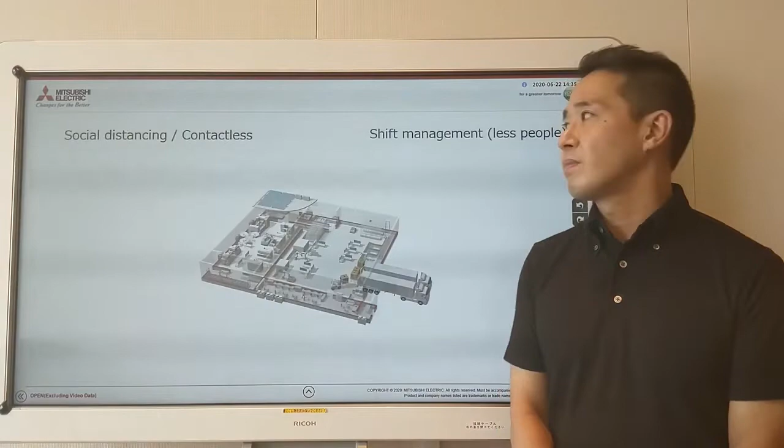Okay, what's changed inside the factory? I think there are 2 main points that have changed. The first thing is we are going to need to do social distancing and contactless. The other thing is shift management, meaning we have to manage the factory with less people.

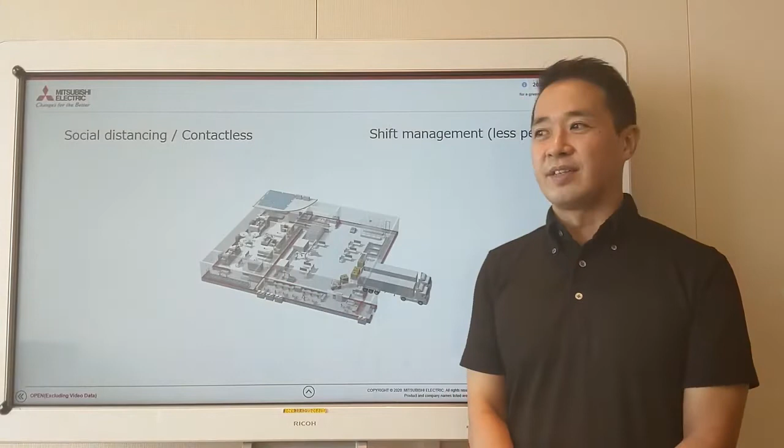First, about social distancing and contactless. I think you can imagine, every day in the restaurant you say take your social distance, but it's the same in the factory. We can't afford to have 2 people close together. They have to take their distance 2 meters away.

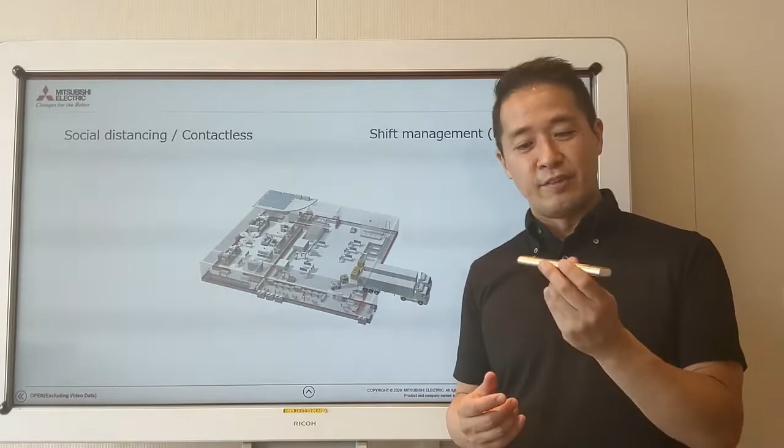And the other thing is contactless, meaning in a normal factory you would have one product flowing out the line, but in this case, this product may be the carrier that will infect everybody throughout the factory line. So you want to reduce this contact as much as possible.

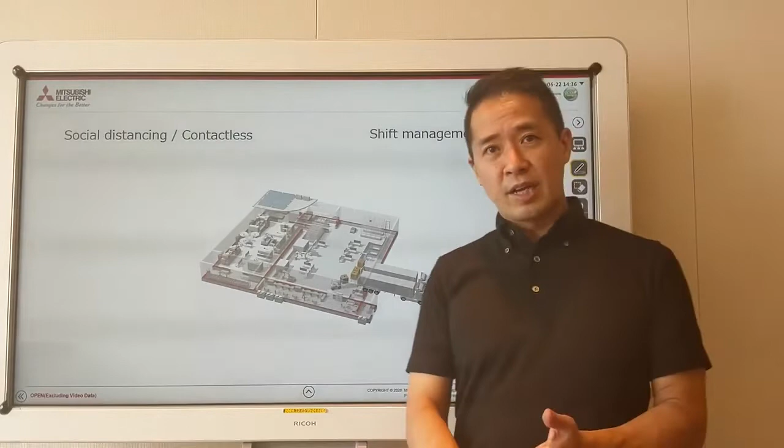In order to accomplish this, what do you need? I think there's a couple of things. Of course, doing more machining or putting more robots inside your factory line is an obvious choice. If the machines are doing the work and humans are not, then you reduce the risk of having infections.

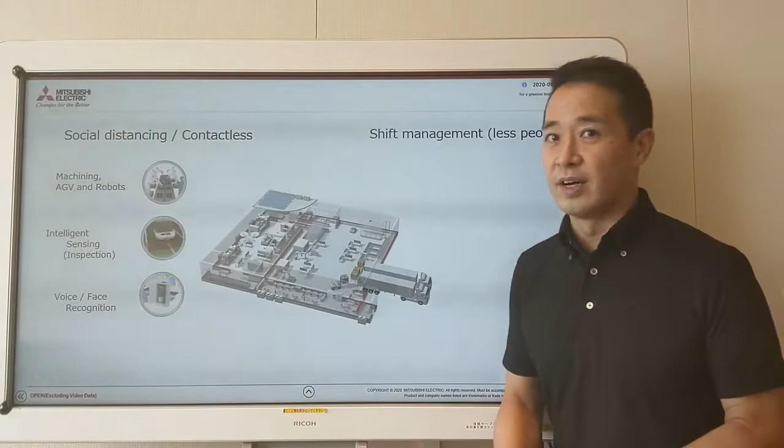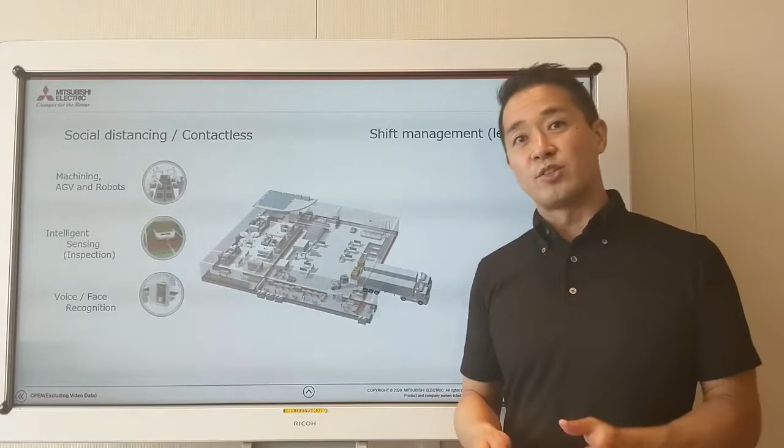The other thing is also sensing and inspection. In previous days, you would do it by eye, using a hand, touching the product. But we have all this cool technology with image recognition and vision inspection. So why not use this technology more in the factory to avoid contact?

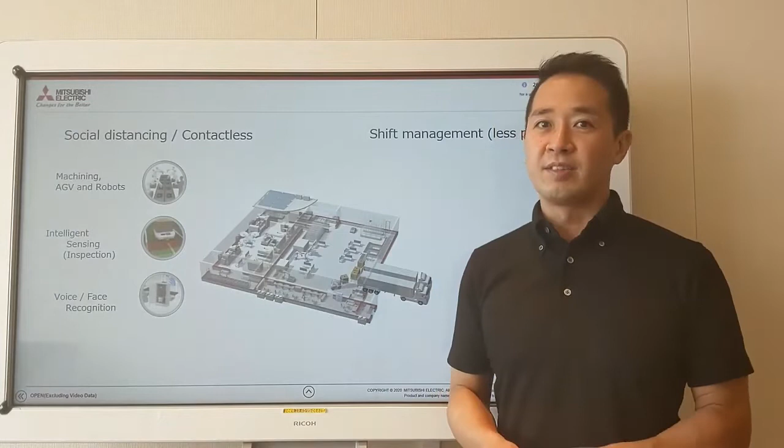And the other thing is voice and face recognition. There's a lot of buttons in the factory. You're pushing a screen, you're pushing a button, but this is also some risk to become contagious. So in that case, if you can use your voice to control things, why not?

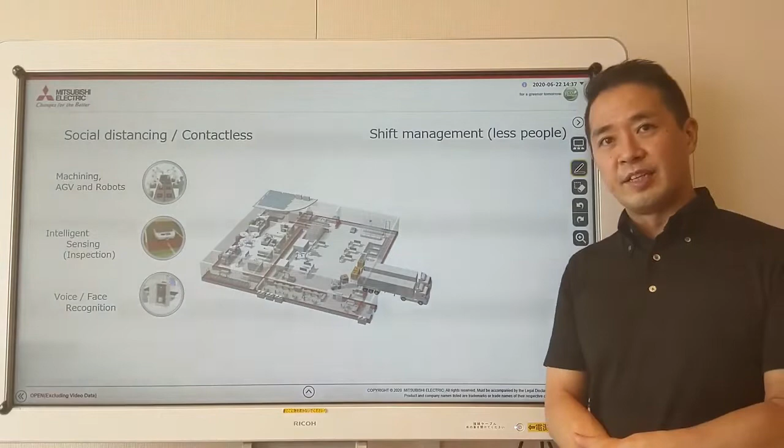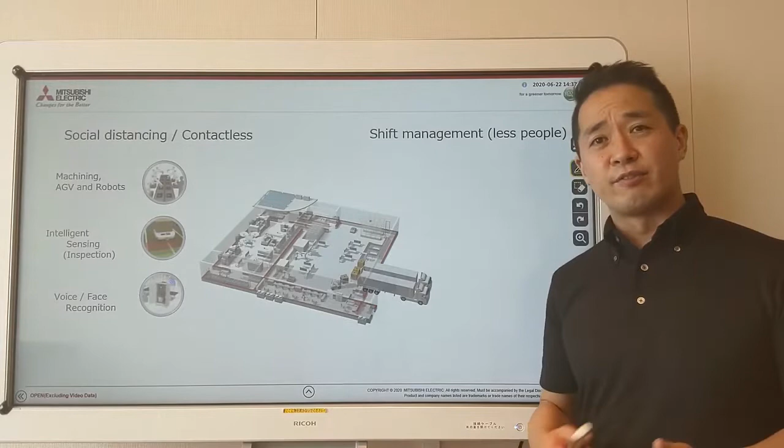The other aspect is shift management, meaning less people. We're doing this also in our factory. It's very risky to have one shift with all the crucial people for the production line working at the same time, because if you're unlucky and somebody gets infected, you have the risk of shutting the whole factory down, and there's nobody who knows how to operate the line.

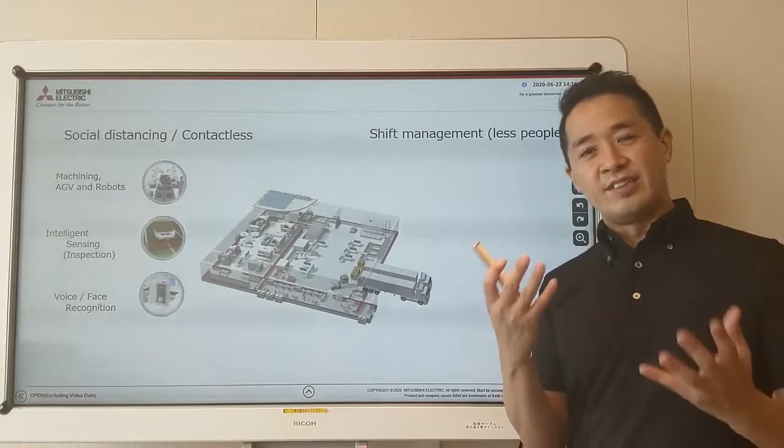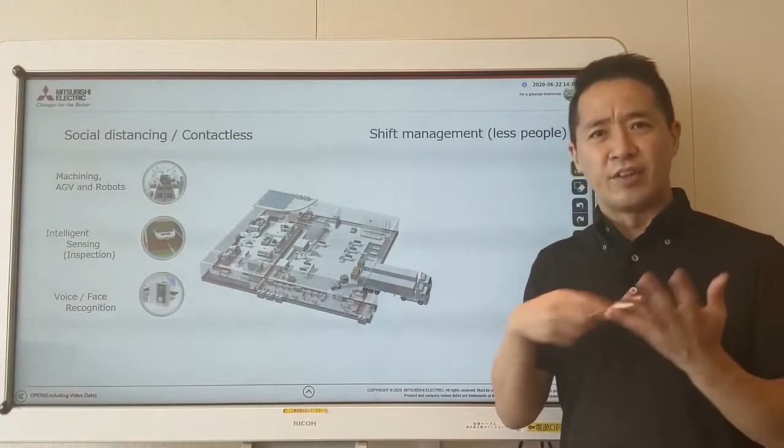So what we're doing in our factories is dividing up the people into shifts and making sure on these 2 shifts that there are people who know how to keep this production line running. If we can do that, even if unluckily one shift was infected, we still have the other shift able to continue production, so we'll still be operational.

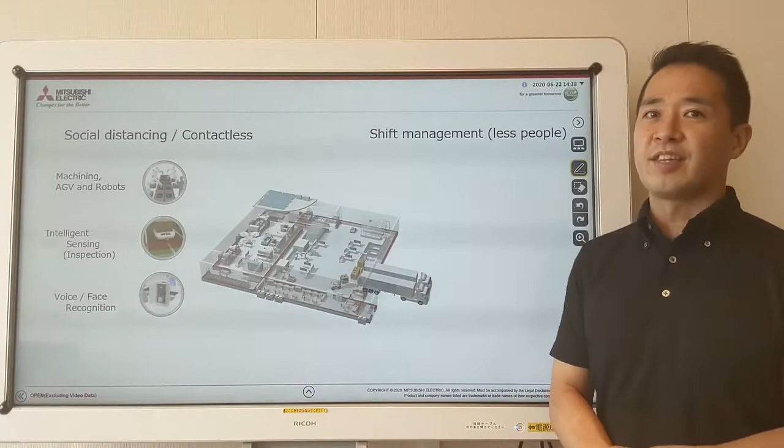So think about this. If you think about shift management, it means 2 things. One, that you're going to have to manage with less people, which means you're going to need more automation. And the other thing is you're going to have to grow the knowledge level of the fewer people, because there's less people to run the line, meaning they're going to have to do more multitasking.

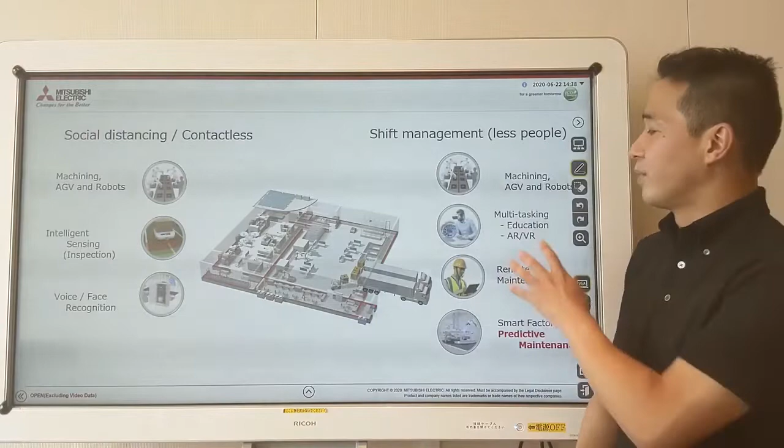And in order to do multitasking, you have to teach them first. So you have to educate them to learn some of the tasks or some of the operations that they didn't know before.

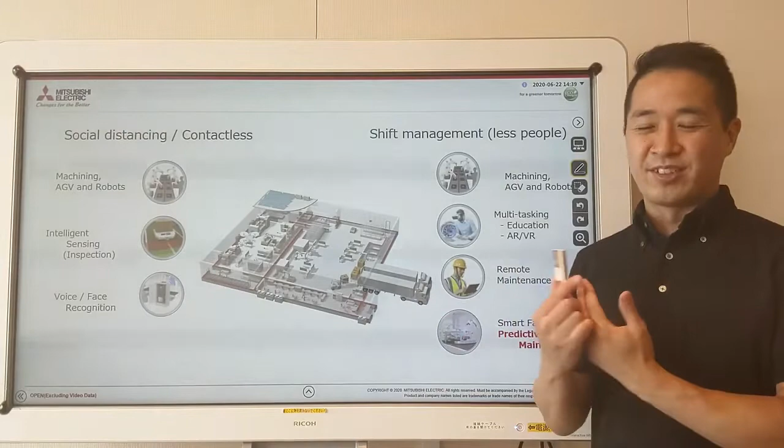But it's really hard to do education now, because education is standing next by the worker and teaching how to do things, but that's not obeying your social distancing. So I think we're going to be seeing more AR and VR tools to make education easier.

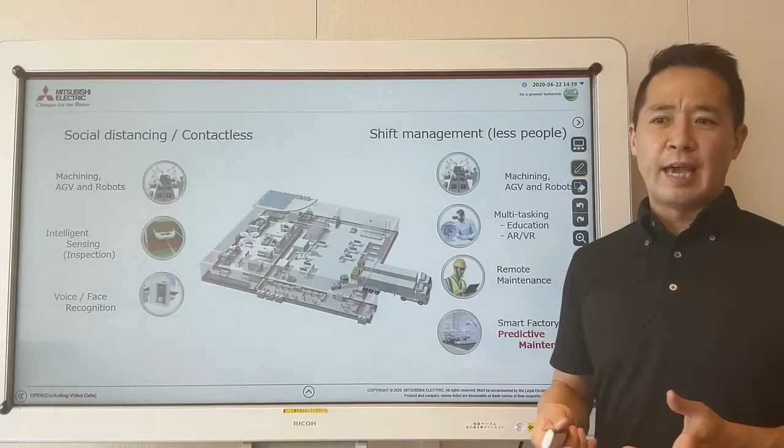One more thing is remote maintenance. Of course, you can't transfer all the skills, so there will be times when you're off shift and a big problem happens in the production line, where you don't have the right staff because you're separated into two. In that case, it's vital for him to remotely access the factory, see what's going on, and send advice to the staff working on the factory floor to fix things.

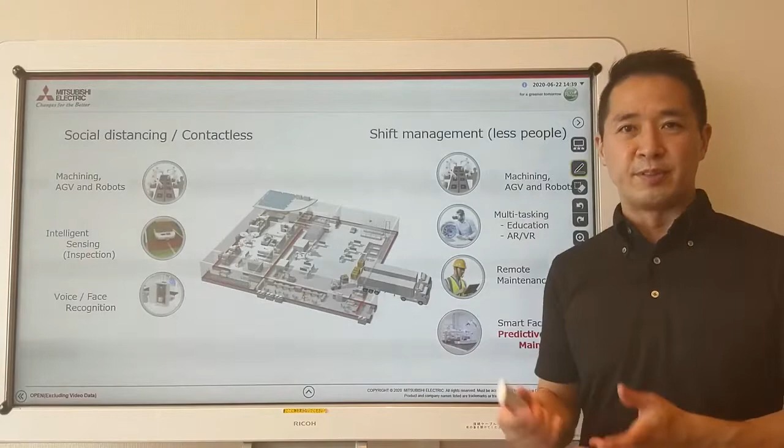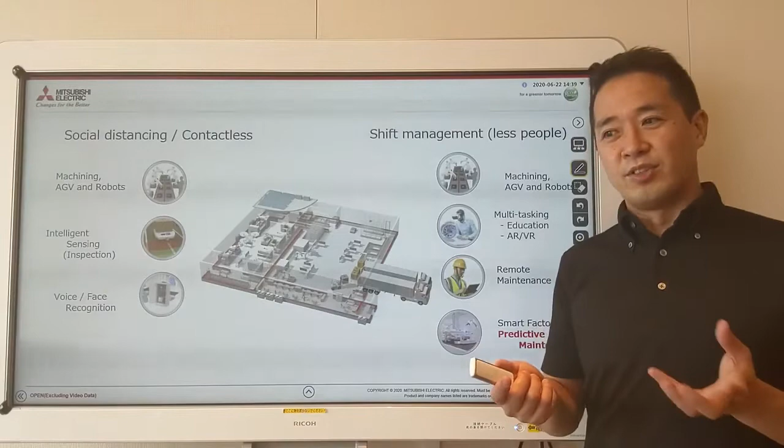And this is the same with overseas trips. In the past, big problem, you would sometimes even have to send an engineer over to the factory overseas, but now you can't do that, because he's going to be confined for maybe 2 weeks before he can get into the factory. So that's why remote maintenance is so crucial.

The next step, and the ideal step, is making a smart factory where you don't need people to do the maintenance work. The AI and the cloud figure everything out and do predictive maintenance for you, so it's easier to work with fewer people. Today I'm going to talk a lot about predictive maintenance, which I think is very important for finding problems that might occur in your factory.

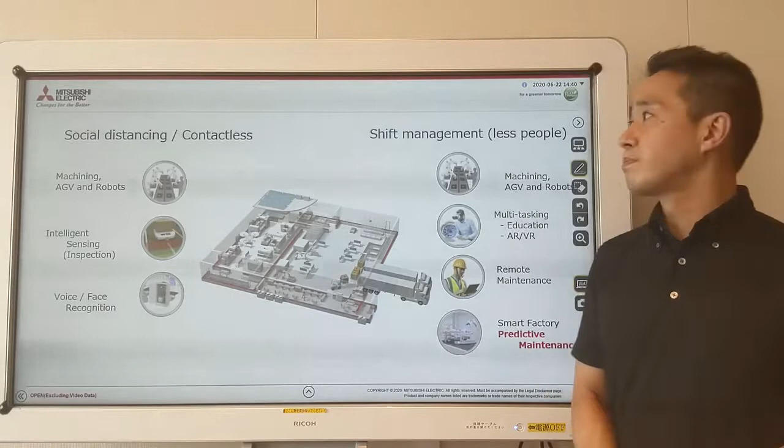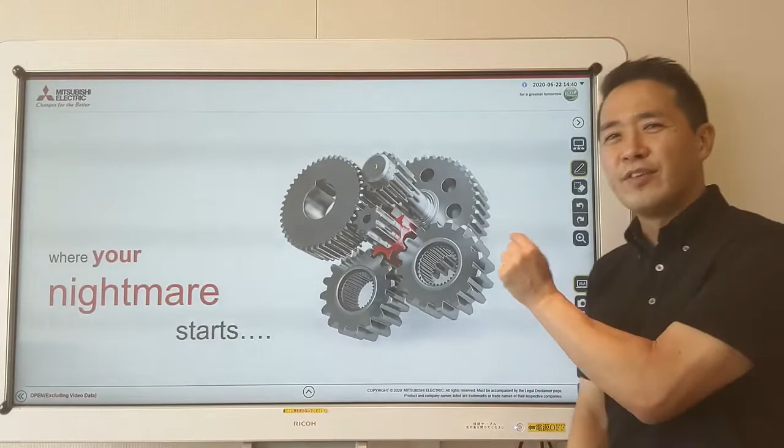I'm going to tell you a kind of story, but I'm going to go backwards in time. Right now, there's a guy who's holding his head. It's because the factory line stopped. A machine broke down. He's trying to find some spare parts to fix the machine, but the supplier says, 'Hard luck, this is a special part, you're going to have to wait 2 months.' So the production line is going to stop for 2 months, so it's actually a disaster, and that's why he's holding his head.

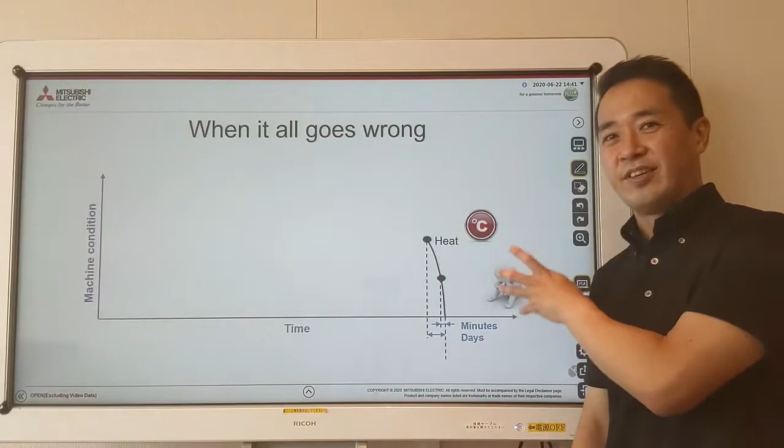But if you look at what happened before this, minutes before, some smoke came up and something was wrong, and they found out there was a problem. But if you look days before, actually this machine was gaining heat, getting a little bit hotter. If you touched the machine, it was a little hot. But nobody found out or decided to do anything about this.

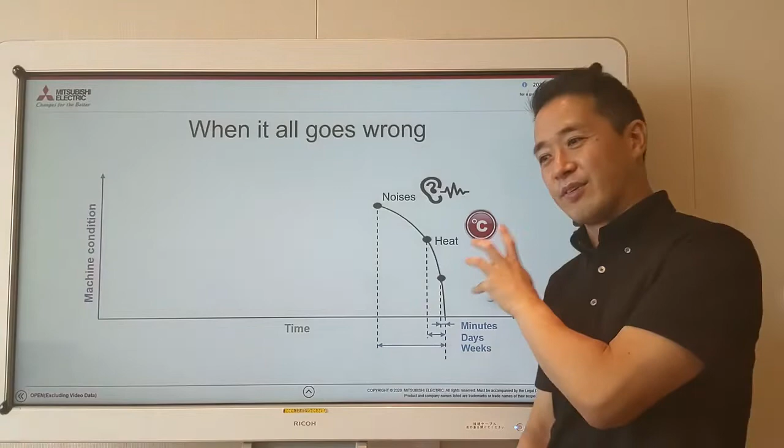Before that, weeks ago, this machine was actually putting out a very low sound that people's ears couldn't hear. It's because a screw was getting loose, and the panel was getting loose and wobbling, so that's why they had this strange noise. And if you go before that, there was actually a lot of vibration months ago, but nobody was paying attention. It was very small, so nobody noticed it.

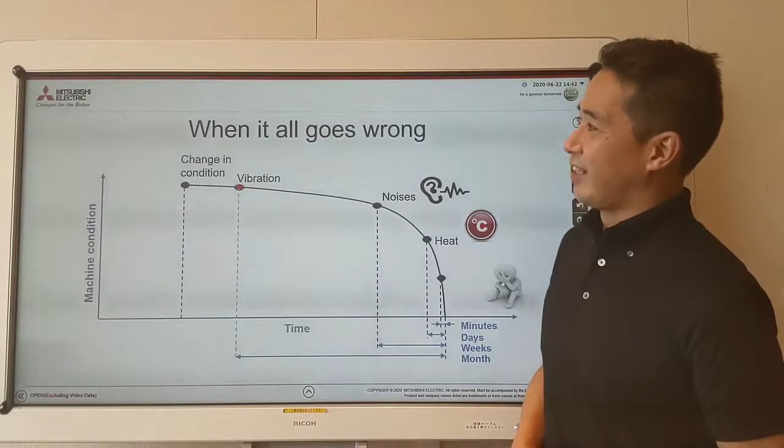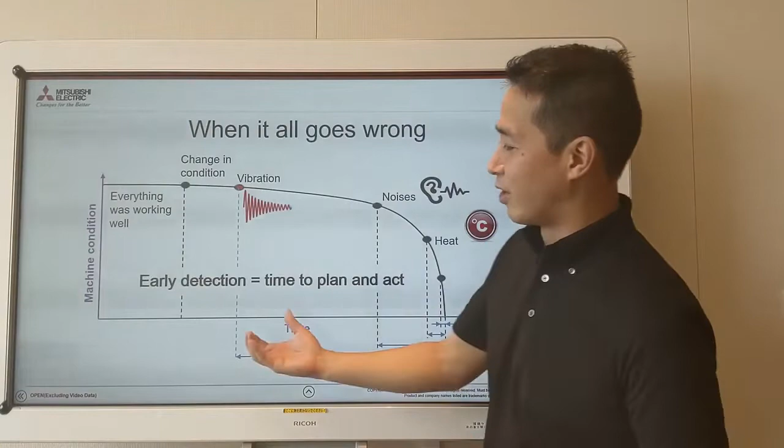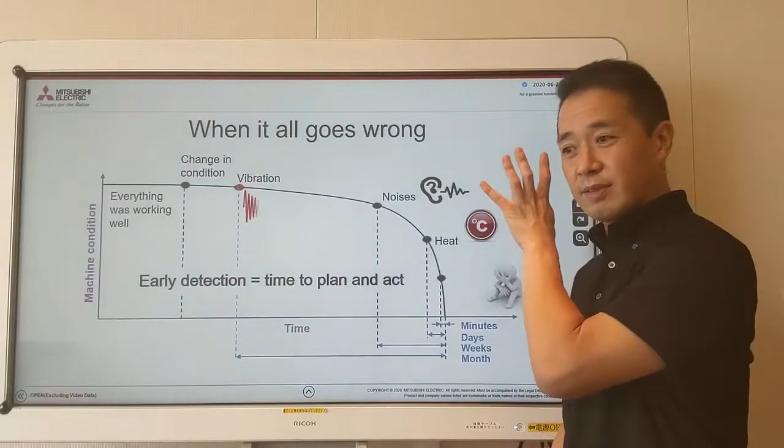But the screw was getting loose over here. What I'm trying to say is there was a change in the condition months ago, and if this guy had been able to detect that before it happened, he'd be able to do something. He'd be able to say, 'Okay, this is a bad trend, so just to be safe, I should probably order some spare parts for this before that, and that way, if something happens, I can exchange the part.' And if he had done that, he'd have had the spare part in time, and he would have been able to avoid this massive shutdown that he actually had. So finding out this kind of change in condition and vibration beforehand is very important.

And that's what we're talking about when we talk about predictive maintenance.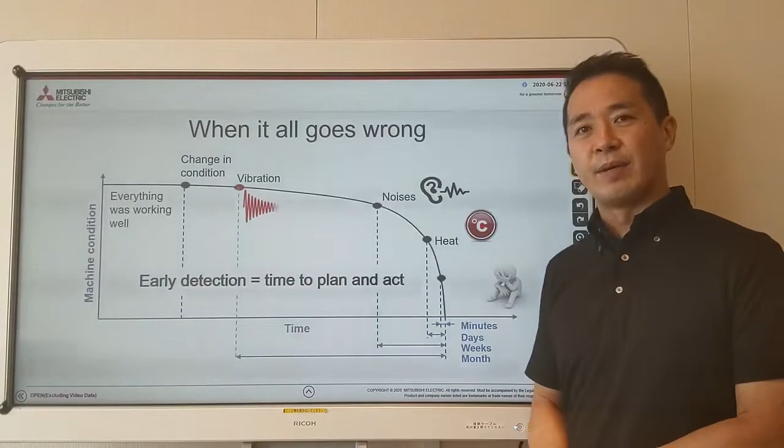For maintenance, you need data. So you're looking at the manufacturing data, what you're producing, the time. Also very important is the machine process data: the temperature of the machine, the pressure, the voltage of the motors, the current, those kinds of data.

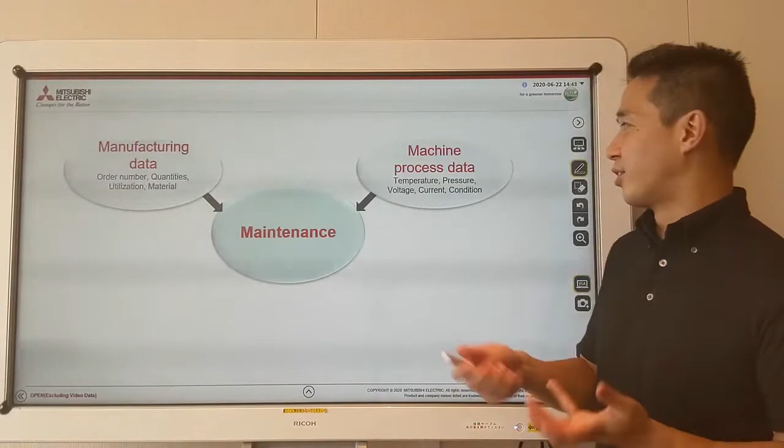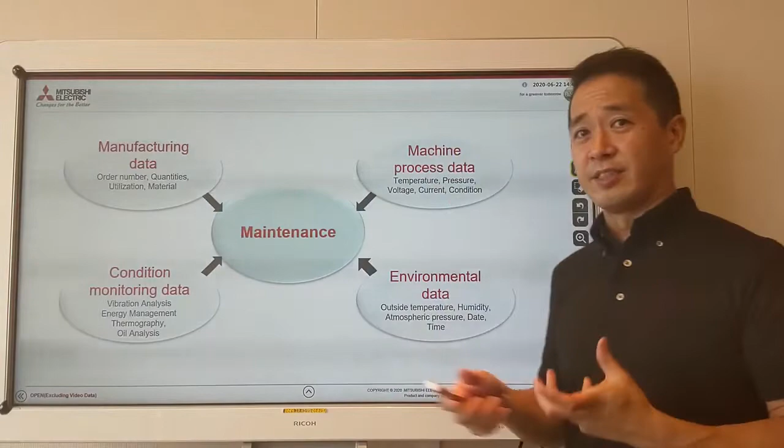Also, environmental data is very, very important, especially in predictive maintenance. We're talking about temperature data, humidity data, atmospheric pressures, and you also need some kind of maintenance condition monitoring data, like models and mechanisms to absorb this data and figure out when it's going to break. So maintenance is about collecting data and utilizing data.

Well, your final goal is to install a 24-hour doctor. What I mean by a 24-hour doctor is, usually when you see a doctor, he says your blood pressure is going up or you have too much blood sugar. Every 3 months you go, like a normal checkup. But sometimes every 3 months is too late in a factory. You need to find out if something's going wrong the minute it's going wrong.

In order to do that, the best way is to have a doctor always looking and checking what your health is doing. And that's what we're talking about when we talk about predictive maintenance systems: installing a 24-hour doctor that is constantly monitoring the system and health of your factory.

But you can't automatically make a predictive maintenance system. It always starts with collecting data, because if you don't have any data, you can't do any maintenance, you can't analyze it, you can't visualize it. So you always need to start with sensing, putting sensors on, collecting the data. Later you can visualize this data and put it into charts. Then you can decide when something is going wrong, and if something's going wrong, make sure somebody knows about it by sending out an alert.

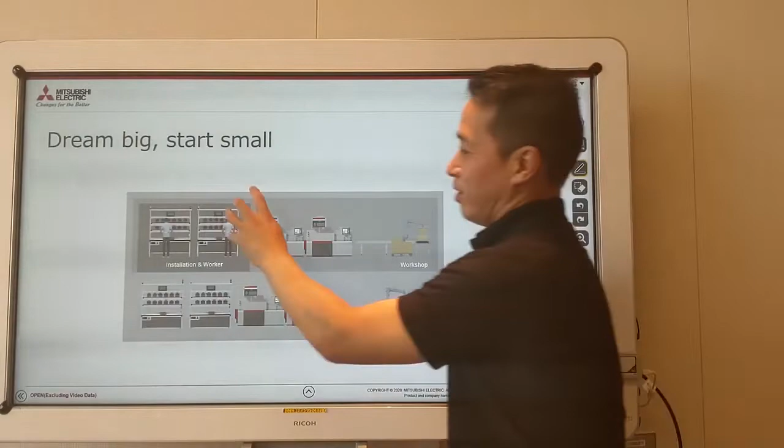So first things first. You're dreaming big, but actually you're starting small. After you do the factory line, you can move to another factory line, and finally you'll be able to do predictive maintenance for your factory as a whole. But everything starts with the individual machines.

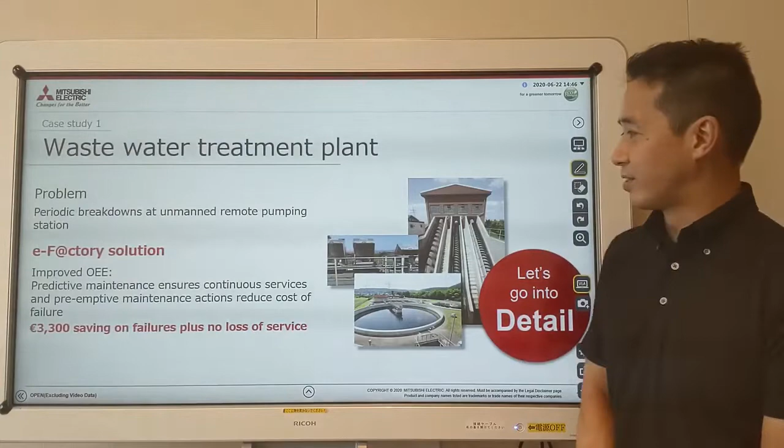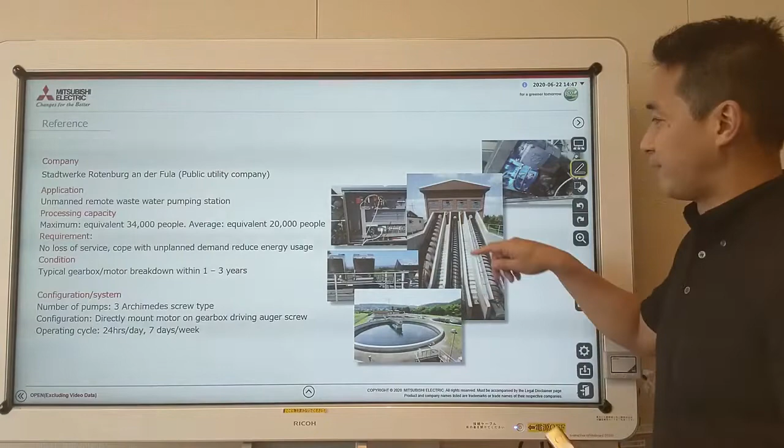It looks a little complex, but there are simple ways to do predictive maintenance, and I want to show you some examples of how simple it can be. I'm going to start with the example of a wastewater treatment plant in a small town in Germany. So let's go into the details. This is the application. It's moving wastewater from the bottom side to the upper side, using these three Archimedes screw pumps, which are rotated by a gearbox and a motor.

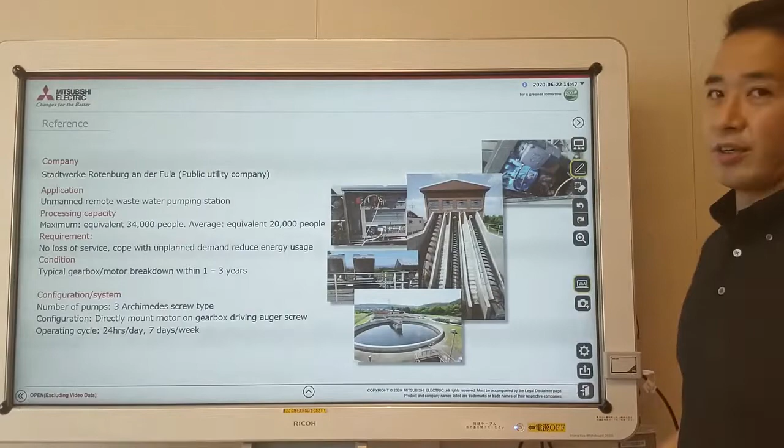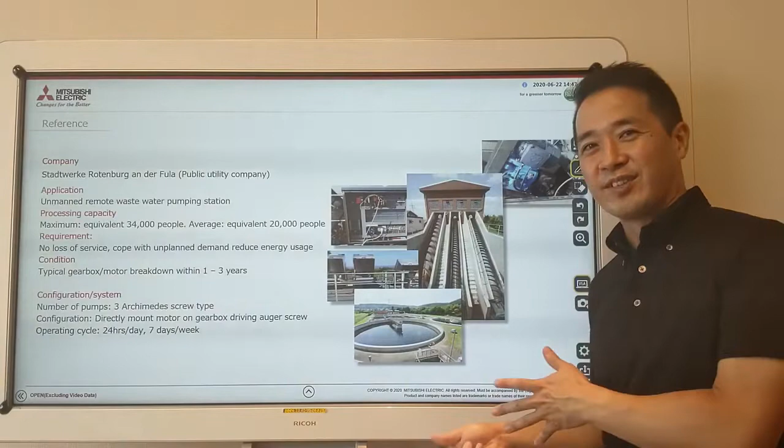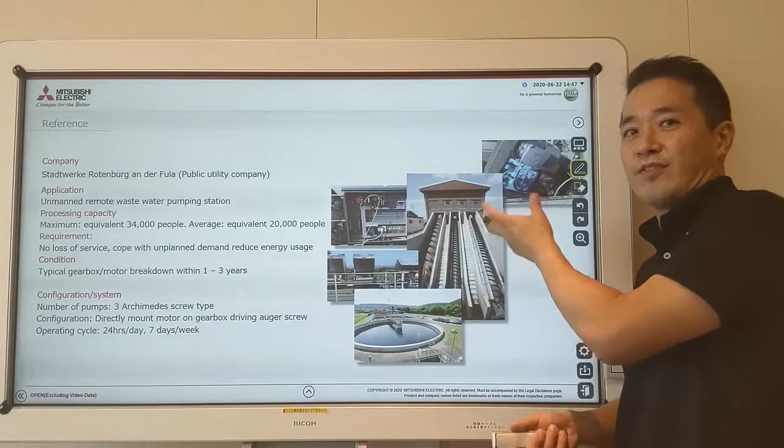The issue with this application is that it's an unmanned plant, meaning no one works in this facility, and the screws break between 1 and 3 years. So you can never predict when it's going to break. When it breaks depends on how much garbage people throw into the wastewater. If a lot of people throw a lot of garbage in, the load on the screws becomes bigger and it breaks faster, for instance in 1 year. If the water is clean, the load is less, so it might last 3 years, but you never know. It depends on everyday life.

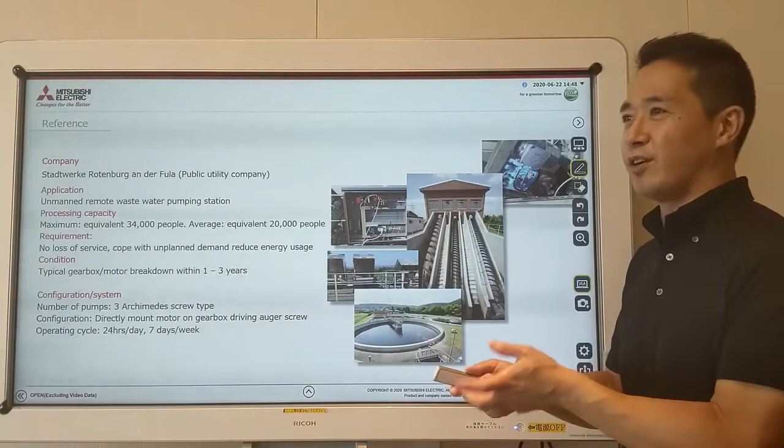They were doing periodic maintenance, meaning every 6 months they go, check to see if everything is okay, and go back. But sometimes they got an alarm that it was suddenly breaking and everything was overflowing. They wanted to fix that, predict when it would break, and fix things before the actual trouble happened.

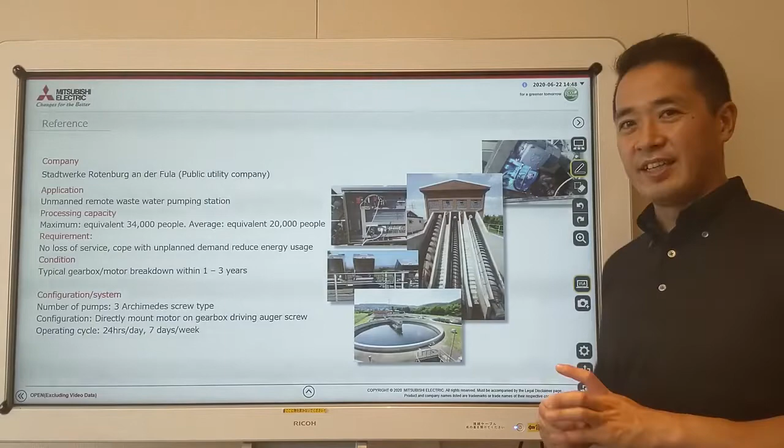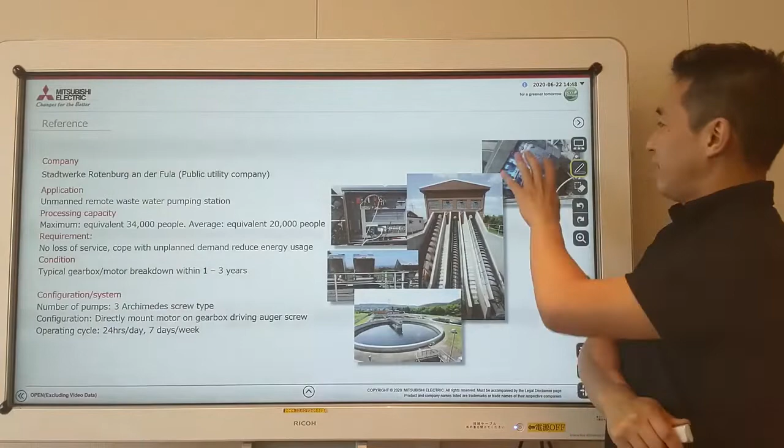So what they did is they installed a predictive maintenance system, a 24-hour doctor. It's very simple. When you think about predictive maintenance, a lot of people think you have to put sensors all over the place. But if you look at this specific application, usually the gearbox breaks, like 95% of the time, because the screws are connected to the gearbox, and this has the most load.

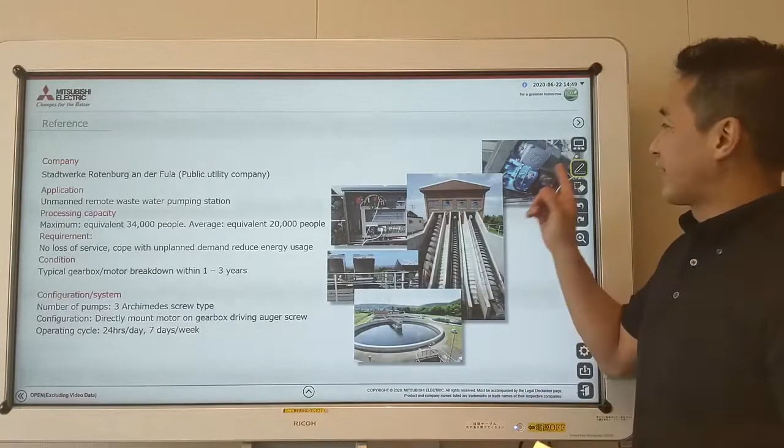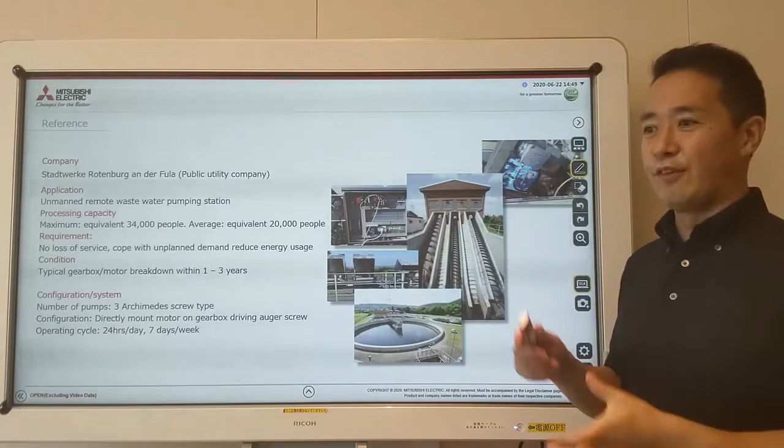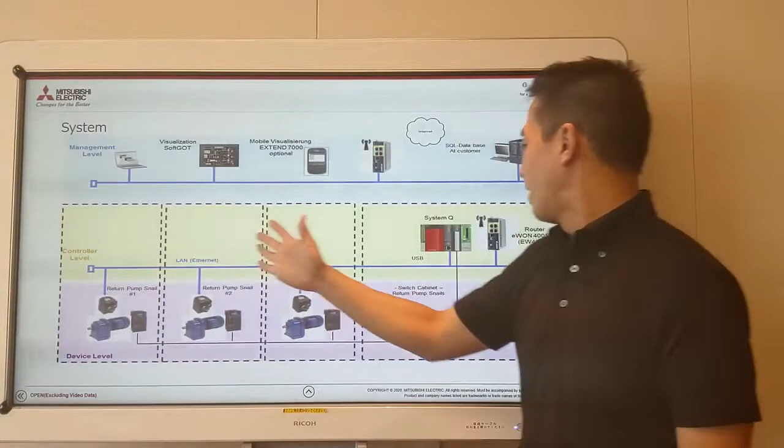If you look at the gearbox, it's connected to a motor that's rotating the gearbox. What we did in this case was we put a smart vibration sensor on the motor, because if it felt more vibration, then we know something's going wrong in the gearbox, and then we could send out alarms. So it's a very simple system. We just have 3 smart vibration sensors placed on the motors on the Archimedes screw pumps, connected to a PLC, and then remotely we connect this to the central maintenance center.

So the benefit of this is, first of all, if you wait till the gearbox breaks, a new gearbox costs about 5,500 euro. On the other hand, if you can fix the gearbox before it breaks, then an overhaul costs only 1,000 euro. So you save 4,500 euro just by doing this. The other obvious benefit is you don't have any complaints from the city if something goes wrong, and it's not an emergency to handle these kinds of situations.

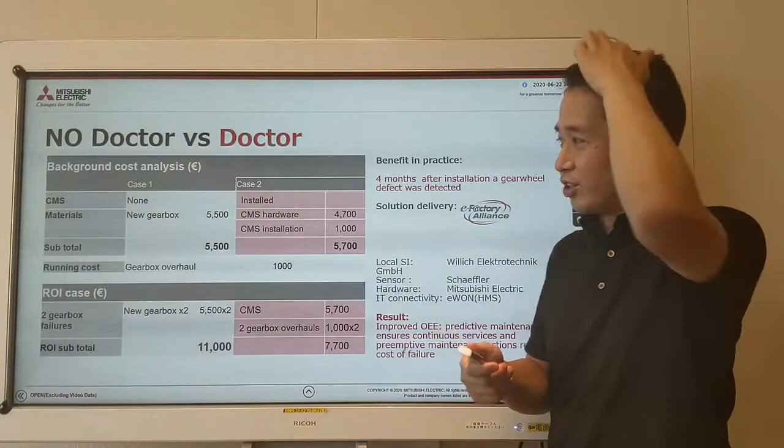So the cost of this was roughly about 5,700 euro, meaning that 2 gearbox failures is about 11,000 euro. So after 2 breakdowns, you've already paid for the condition monitoring system. So the ROI is very simple and achievable. And it's a very simple application, as you see. We were able to develop this with the partners, with Schaeffler, with a system integrator, and we did the remote connectivity with Ewon and HMS.

And luckily, it worked. 4 months after the installation, we got an alarm that the vibration pattern was not so good. It was different, and we went and found the gear wheel defect. So it's a very simple solution, but very effective, and you also get the ROI.

Next, I want to talk about maintenance on the edge. Lots of people have an image of doing this kind of predictive maintenance in the cloud, but in reality, you have no time to talk to the cloud when you're doing predictive maintenance. Think about a smartwatch where you're monitoring your heartbeat. If something goes wrong with your heartbeat, then you immediately have to call an ambulance, and you have no time to do the analysis. It's a split-second decision.

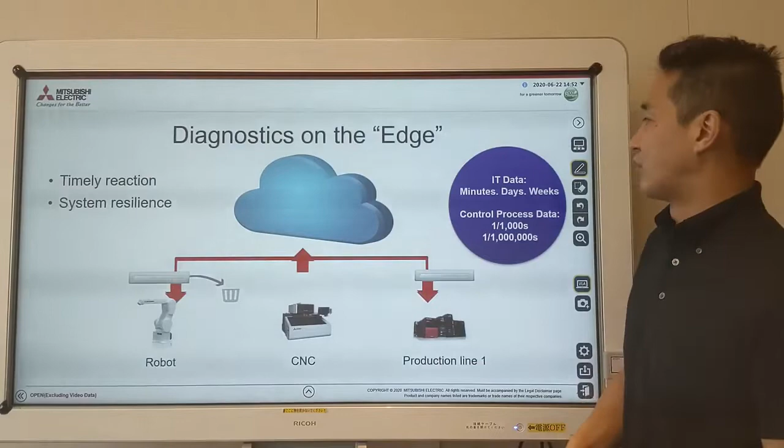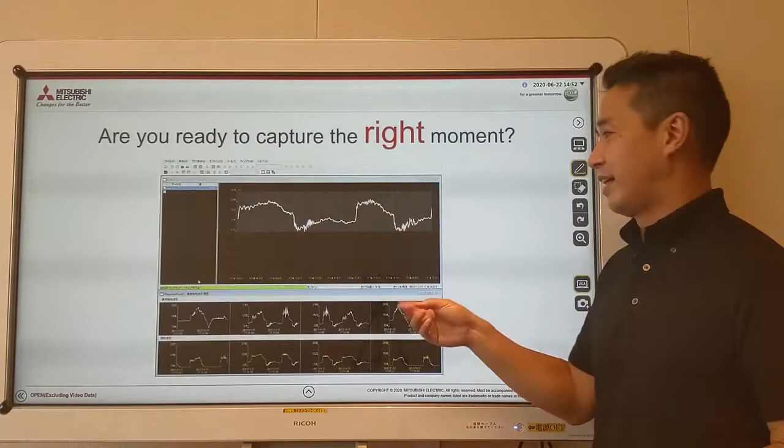Are you ready to capture the right moment? If you look at these waves of quality data, they're moving in milliseconds. You have to find this little distortion in these waves on the millisecond level, and you're never going to be able to do that if you're communicating with the cloud. All of this has to be on the factory floor with an edge computer.

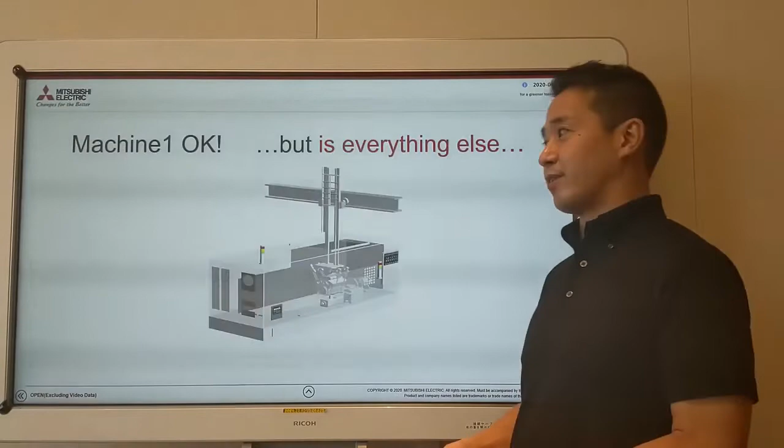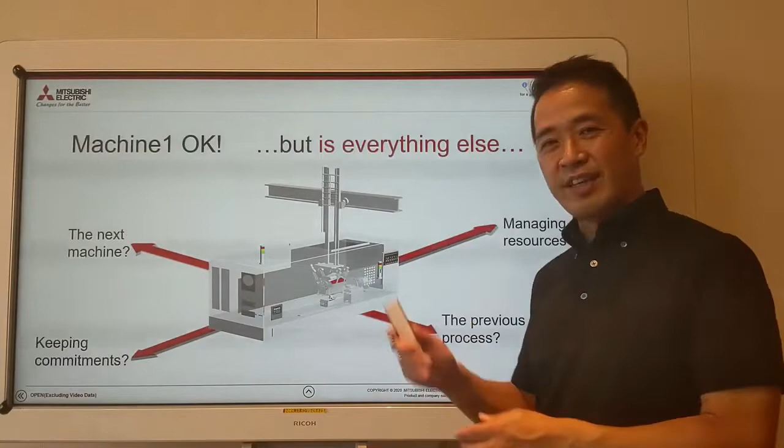Okay, so we put predictive maintenance on one machine. We're monitoring vibration on the motor. But the issue is that we're so interconnected right now in our factories. Even if you can predict a break on this machine, you have to think about what happens before in the process and what happens afterwards.

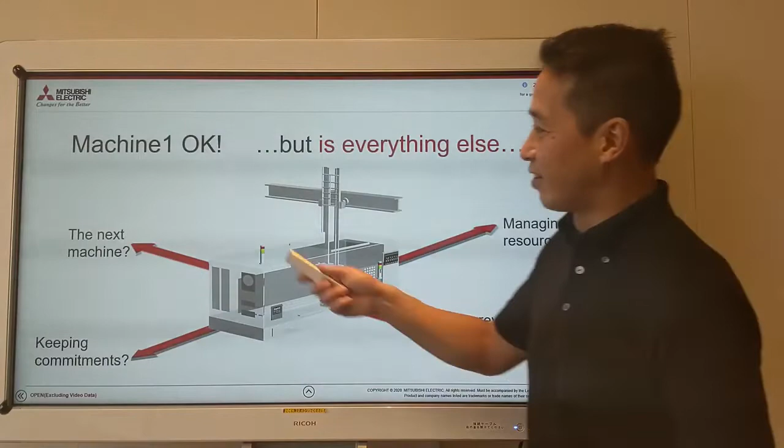Because if this machine is going to break and you're going to have to do maintenance on it, that means you're going to have to stop all the manufacturing processes before this, and the manufacturing processes after this are going to be stopped as well. You have to think, okay, this person that's managing the machine has nothing to do, so maybe I should put him on another task.

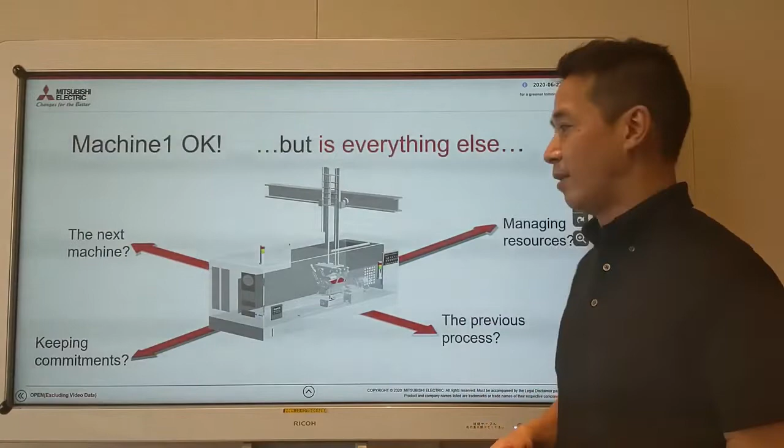And you have to think about the parts that are incoming from your suppliers. Okay, maybe because we have to fix this machine for 2 days, then you have to say, okay, supplier, wait 2 days, we don't need any product then. And this was, in the past, done by your experienced factory staff. They're smart, they have experience, so they know who to call, what to do.

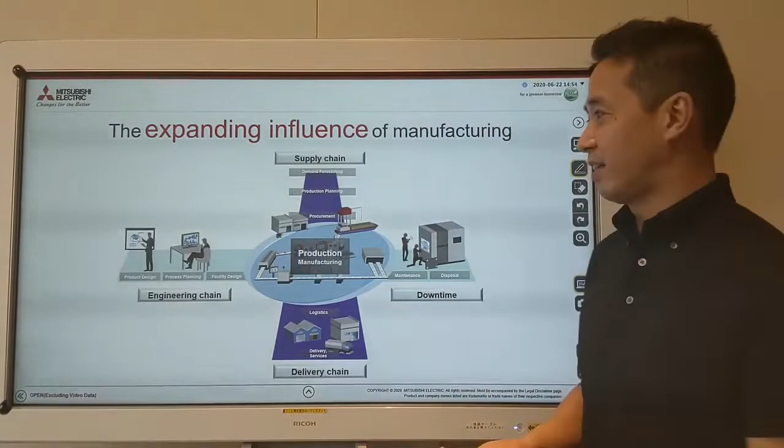But it's going to become more and more complex in the factory because, as you know, right now the delivery chain and supply chain are so interconnected, and also our engineering chains are connected as well. So managing how what happens here has an impact over here is very, very difficult to manage with the human mind. And that's why I think AI will have a bigger role in the future, because AI has the capability of figuring out what impacts what when something goes wrong.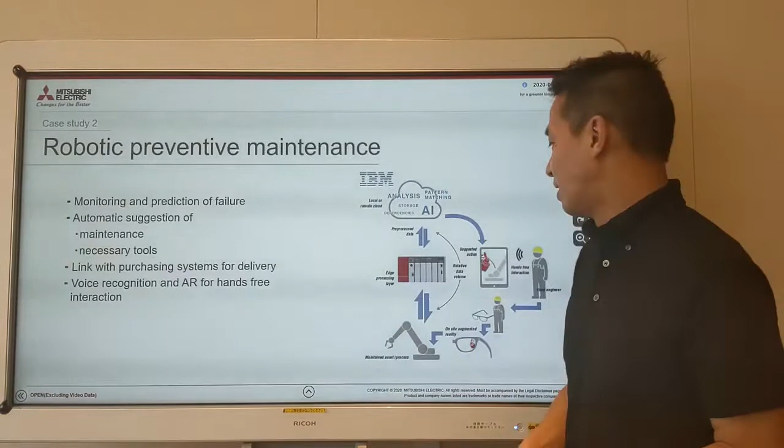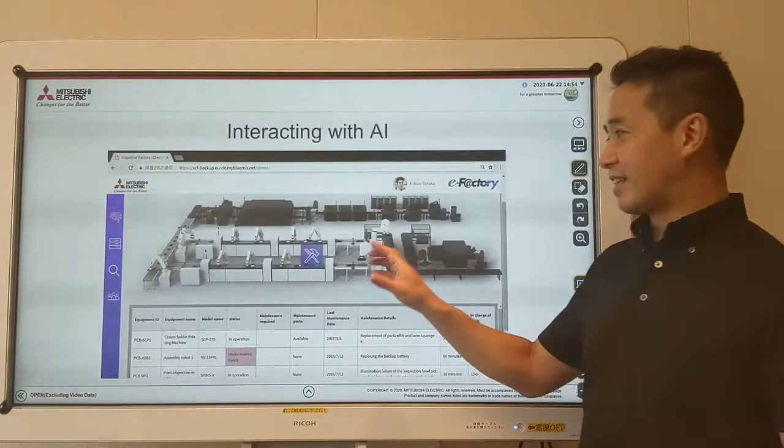It's just a sample application that I have more detail on in my AI for robots presentation, but we're monitoring a robot over here with an edge computer, and in this case we're talking to the IBM Watson AI, figuring out when something's going to go wrong and what to do with it. So this is the actual maintenance screen, so it's detecting what's going wrong.

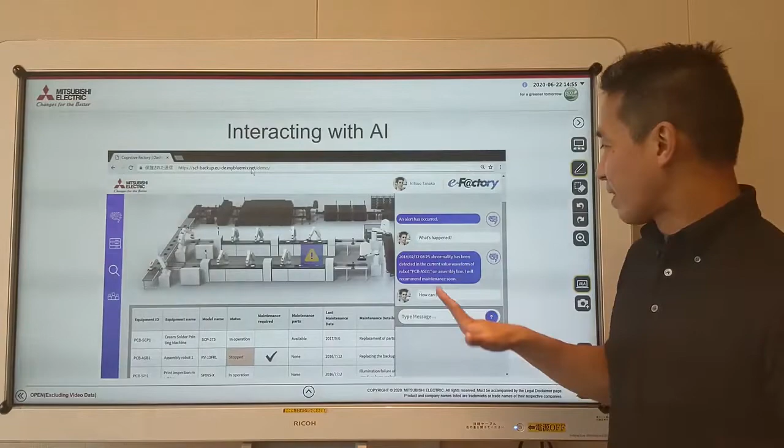Okay, we have a robot that's going to fail, and in the future, I think it's going to be like this: a chatbot box opens, we talk to the AI, and the AI tells you exactly what to do. In this case, it's saying there's a current value, there's a bad waveform in this robot, so these are your maintenance options. You check one, and it's going to tell you, okay, we have these parts in stock, so it's okay to do maintenance, or we don't have it, so I'm going to go to the SCM system and order it for you.

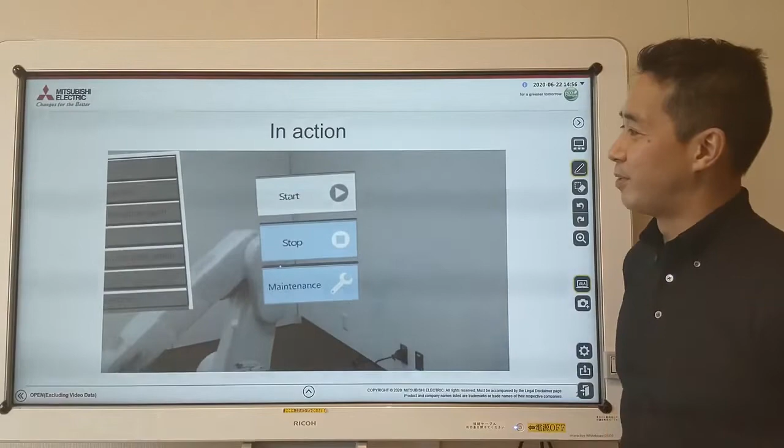Is that okay? So it's going to be easy, because the AI is going to decide everything for you and tell you the right options, adjusting your maintenance schedule. So I hope this technology becomes more and more refined. And at the end, you put on your AR glasses, you go to the machine, and it's going to tell you exactly how to repair this machine. It's pretty neat. I have more detail on this in my AI applied to robots presentation, so if you're interested, you can take a look.

I think one of the points is making life easy for you. Not a lot of people have detailed knowledge about predictive maintenance. So that's why, as Mitsubishi Electric, we want to help you with these issues. For instance, your first steps are always visualization and remote maintenance. So we have good SCADA solutions, remote HMI solutions for you. We have a lot of edge computing solutions, so you can pick up the waveforms in the millisecond time frame, and also do simple analytics with IPCs and real-time data analyzer software as well.

We have solution packages, so you don't have to do a lot of programming or making screens by yourself. Vibration sensor solutions working with partners. And at the end, one of our goals as Mitsubishi Electric is to embed these kinds of predictive maintenance functions into the components themselves. For instance, if you have a robot, the robot is going to tell you when it's going to break. And I think that's a lot better, because then you don't have to set up your own predictive maintenance solution. All you have to do is buy this robot, and it's going to tell you when it's going to break. And we're putting this kind of functionality in our machines, in our CNCs, our inverters, and our servo motors as well. So I think this is a good start for predictive maintenance.